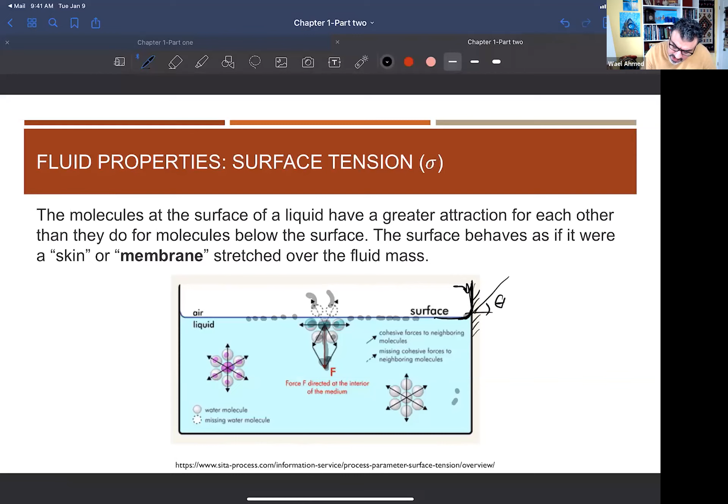So in general, surface tension is like a force only at the surface of the fluid, acting in a certain direction. So the definition from a fluid mechanics perspective, we define these forces in a property table, which basically lists those forces per unit length.

So it's asking you to consider if this fluid is in contact with a surface. At the edge of this fluid and the surface there's going to be some length, a contact length between the surface and the fluid. And the surface tension given here will be force per unit length.

That's why, for example, for an air-water surface, you will see the surface tension is 0.073 Newton per meter. Surface tension force is always given per length. So to find the surface tension force, we have to multiply the surface tension property by the length where the surface tension force is applied. This is a length we're going to always be looking for in any of the problems.

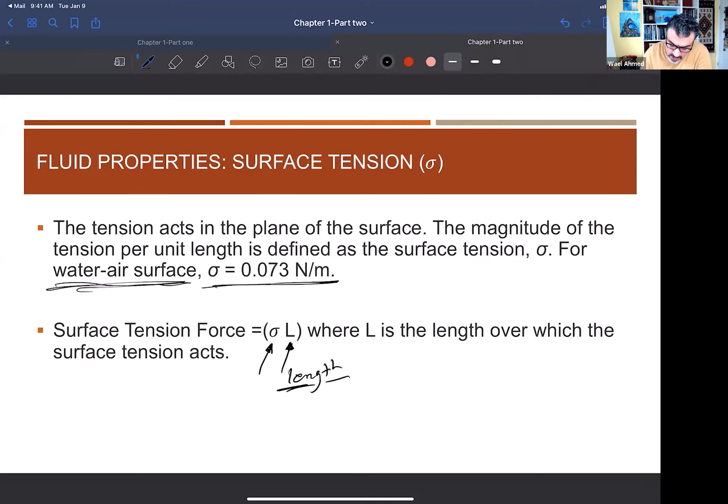So one very simple explanation for understanding surface tension is like when you see mosquitoes or any bug holding on the surface of a lake, and it can maintain balance under this condition. You will see it's basically standing as if the surface of the fluid or the lake is kind of a skin or a membrane that this bug is standing on.

And if you magnify this section and consider the bug's leg here as a cylinder, there's going to be some weight for this bug that is going downward.

And at the surface, the contact between the bug leg surface or body and the fluid, there's going to be some forces acting in this direction, and this is what we call the surface tension force. So you can consider there are some contact lengths here and over here as well, with some forces acting in this direction depending on these lengths.

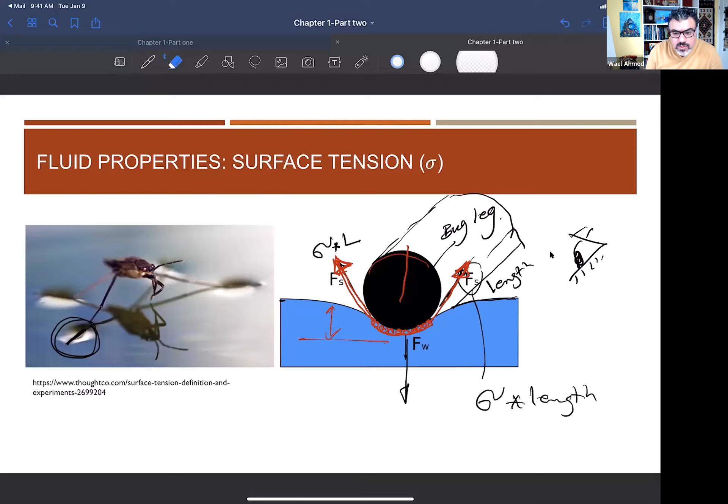As you can see, the bug here is standing at the surface of the liquid. If this bug has a larger weight, it might sink and it cannot stand at the surface. I have an example for you - when we do the analysis, we're going to find out how we can do this.

So let's do the analysis for this bug. One of the things given in this problem is how much maximum mass this bug can have to stand at the surface of the water, if the bug is suspended on the surface and the surface tension of the water is not wetting the leg - we'll talk about wettability in a few seconds.

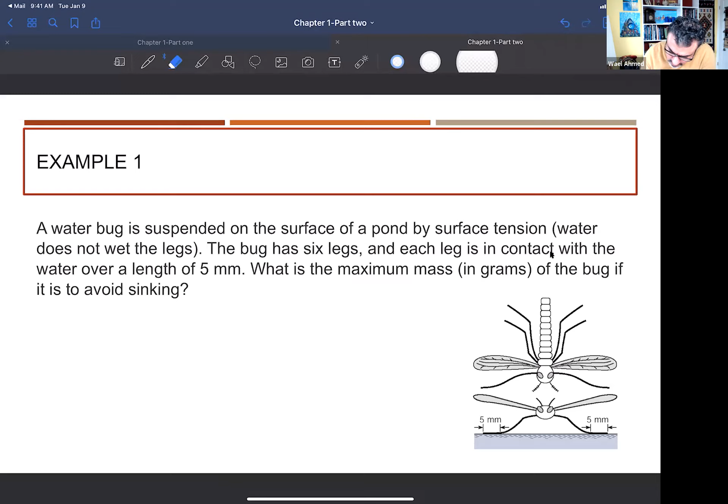The bug has 6 legs, right? So you have 1, 2, 3, 4, 5, 6 legs, and I'm looking at this from the top. But if I look at it from the side, this is basically the bug actually standing at the surface of this fluid.

In contact with the water over the length of 5 millimeters tells you that the shape of the bug's leg is actually stretching over the surface of the liquid, and the contact length is 5 millimeters. So it's not standing at a point, as you can imagine.

So now we need to find out the maximum mass in grams of this bug in order to avoid sinking. Of course, if there were a huge object or a big animal trying to stand on top of the water, it wouldn't work. We're not talking about a large surface tension force here - only a small number, which means only the surface of the water can hold very little objects like bugs and mosquitoes.

Okay, so how can we start this? I know some of you don't like writing these assumptions, but this is very important and you have to train yourself on this. Every time you read a problem, as part of your initial analysis, put the assumptions - what do you have, what's given, what's missing, and how can we use this information to formulate the problem.

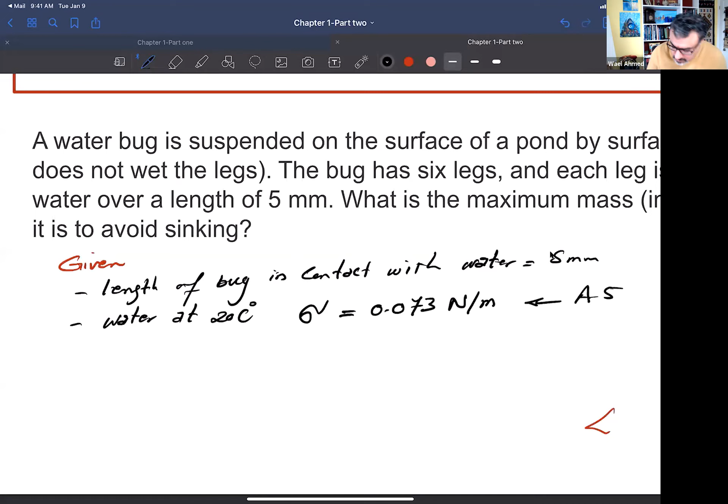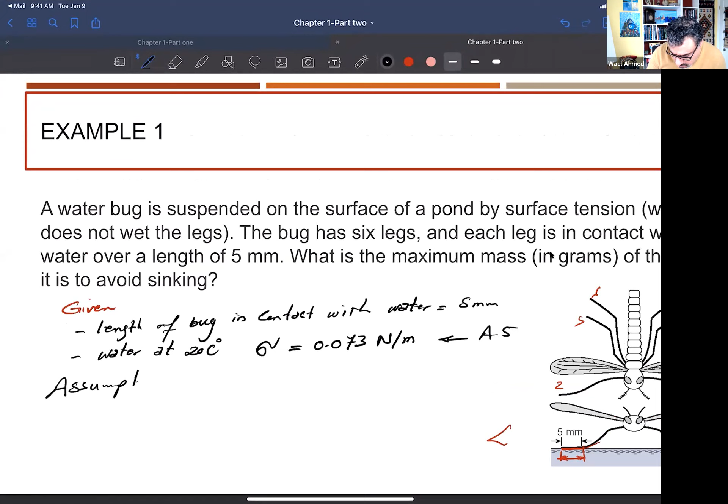So what assumption can we make here? What assumption can be made about FG spread over the 6 legs? Of course, the bug will be symmetrical, right? Anyone disagree with that? Perfect. Water at 20 degrees C - sure, this could be an assumption, no problem. So I can get the property at this condition.

I like this - the force will be distributed equally on the legs, right?

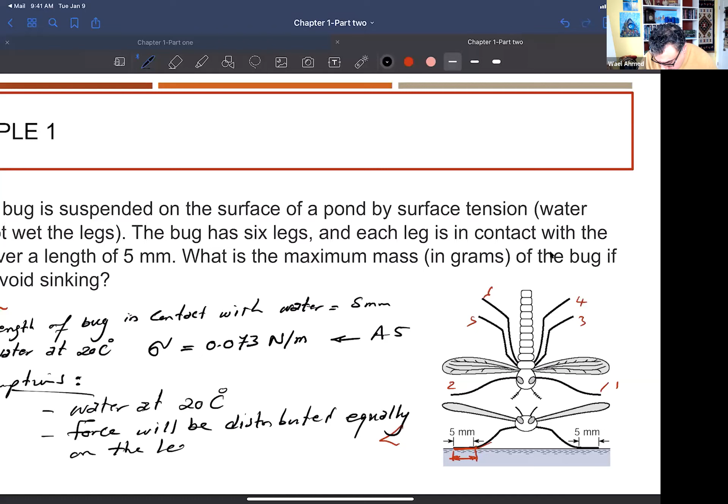What other assumptions? The water is still, sure. But what's most important is that it's still - the water, the bug - exactly, right? So the bug is under balance condition, stagnant, stopping at the surface. Even if there are waves and stuff, that's not our concern now - we're trying to simplify things. But the bug is stagnant, and the force applied on the bug will be distributed equally between the legs.

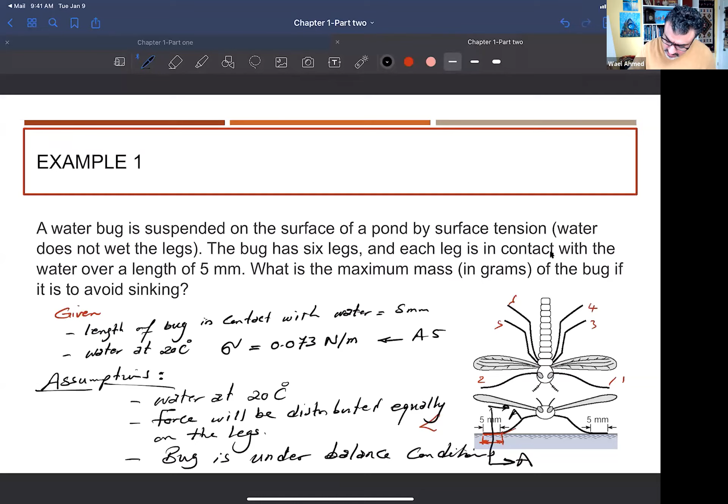So in order to get the total forces, we have to look at a cross section here. So I can look at this cross section - let me just do this.

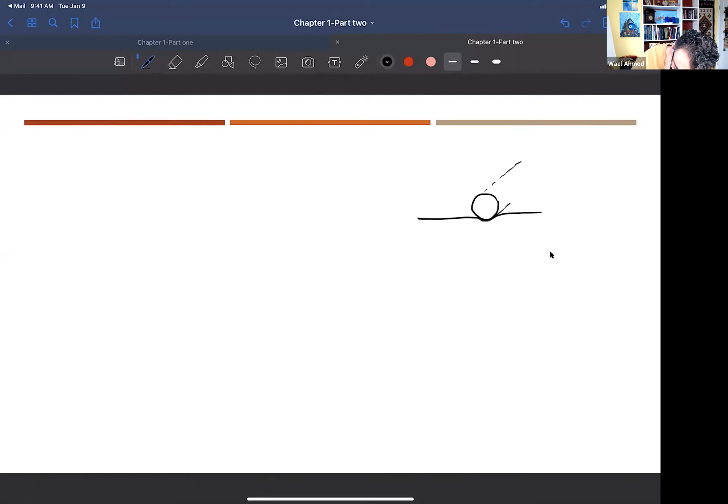And when I mean here by the cross section, this is the leg, right? And I know that this contact length between the bug leg and the water is 5 millimeter, right?

Gravity, that's right. Basically the summation of force will be 0. Remember, I know there is no difference between constant velocity and a static type of thing, because summation of force will be 0. But I want you to make sure that when you are writing something, it has to be correct.

So we don't have motion here. So when we are talking about summation of forces equals 0, we are talking about static, we are talking about balance, right? We're not talking about steady motion or a 0 acceleration. So you have to really differentiate when you are writing these things, okay?

Contact area. So let me focus more on the solution here, because some people are making comments here. But let's say that this is basically the same way as we explained before. So this first layer here is stretched, right? So it's almost like you are carrying the liquid surface. Part of this liquid surface is carrying this leg here, right?

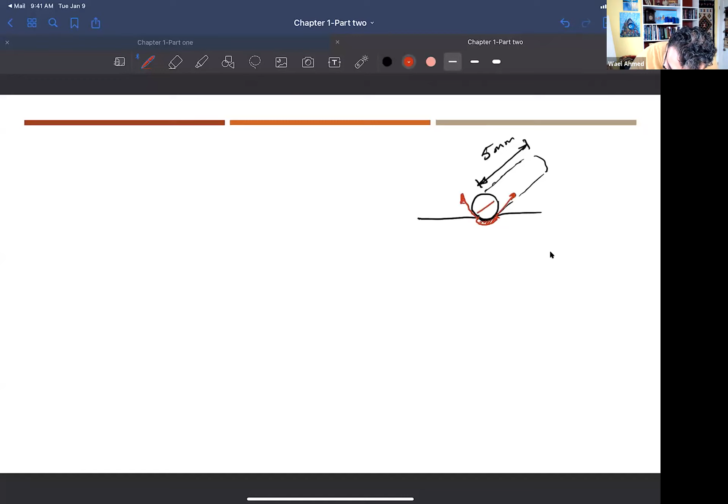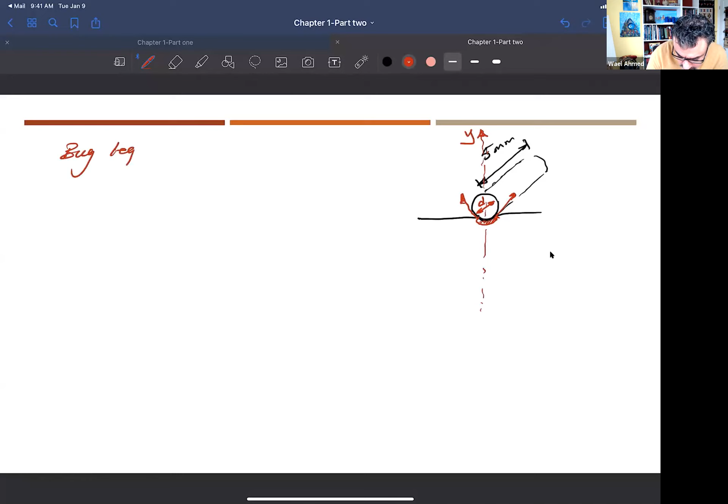And let's assume that this diameter here is D, right? So in this case, this is the vertical direction Y, okay? So there's going to be some angle here, right? So theta, right? What do you think about one assumption that can simplify the problem?

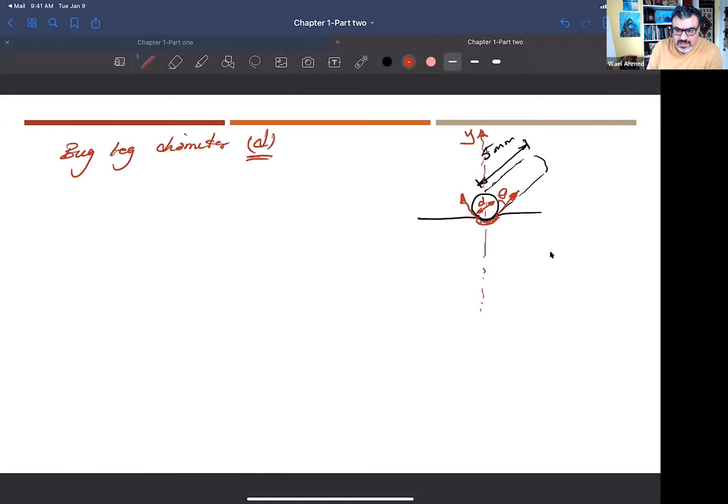Because we don't have the material for this bug leg, right? So we're not doing any biology analysis here. So what kind of assumption in order to simplify this problem? Can we assume this diameter very small? In our fluid mechanics course, we're not really concerned with molecular dynamics. So the length we are talking about here is a very small number. So D here is very small.

Right? And when you imagine D is very small, it will basically shrink into a point, right? So as if this cylinder shrinks into a line, right? It's a very small little point. So what do you think about this theta now? So small, exactly. It's almost 0, right?

So as if this can be converted into a force, right? For each line, this is F and this is F, right? So the force here is equal to what? Anyone? Yeah, first we are talking about surface tension force. Right? It will be basically the sigma

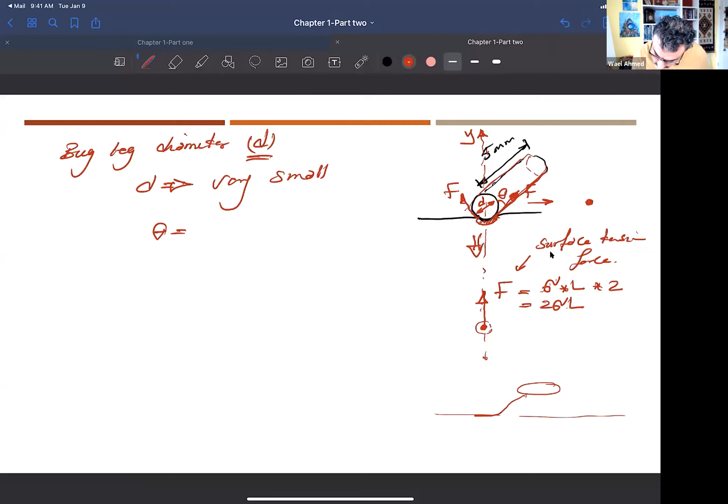And the bug weight will be in this direction, right? But again, the weight will not be applied at the leg. So if we're looking at the bug here, the balance, so theta is 0, right? So now in order to start the problem, we can say that the summation of forces is equal to 0.

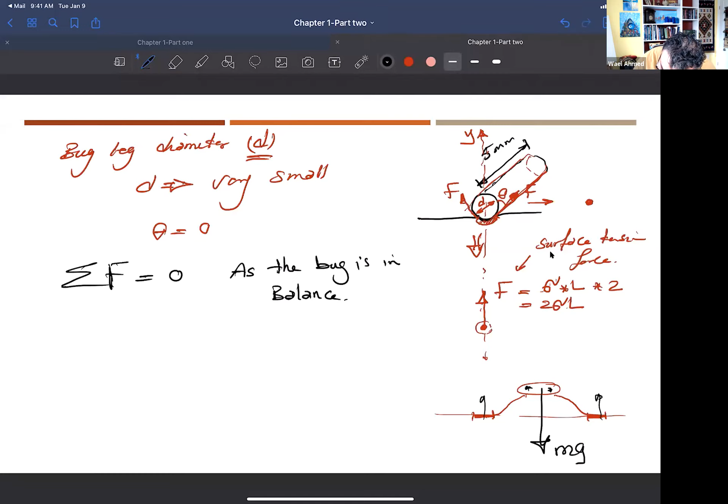So now we have a force that is mg, and this is the total weight of the bug that is acting on the center. And this center could be an imaginary center, right? But now we have forces over the 6 legs, each one of them coming from the surface tension. And for each leg, we have 2, so for each leg, 2 sigma L.

So if I need to do the force balance here, I can take this as a positive direction. So now I know there are some forces here, F leg, and some other forces, F leg for each leg, right? And we have 6 of these. So summation of force here will be mg,

minus, each leg has 2 sigma L, and I have to multiply this by 6, right? And this will be equal to 0, which means basically I have a static condition in this case. So I have m is equal to, I can just take this and put it on the other side, 12 sigma L over g.

And it's very straightforward. Here I can show why it is times 2, one on each side. I hope you can imagine this: when we have a cylinder and the cylinder is carried by a small little surface, you can just look at it from both sides. You will see surface tension forces applied on this.

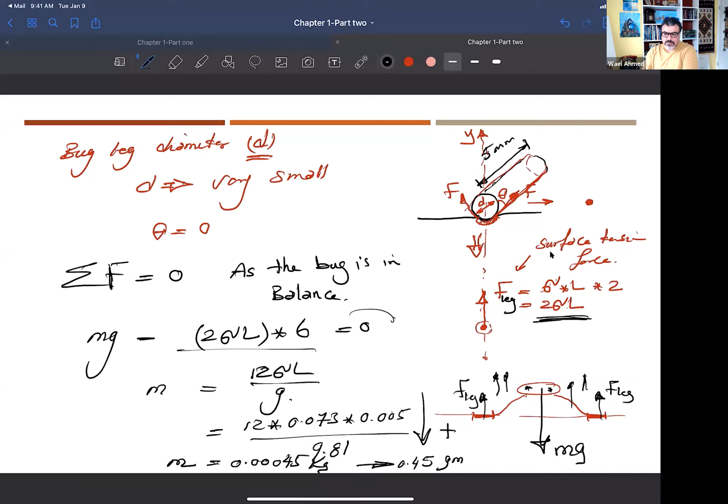So when we are talking about surface tension, the problem that we just solved is one of the applications. But surface tension is involved in many applications where you are trying to define the droplet size, right? And this is very important when we are trying to design fabric, for example, where the contact length between the fluid and the surface is very high, and then you will see some phenomena related to surface tension. We call it wetting and non-wetting condition.

Surface tension is one element, but the other thing that is very important is the energy of the surface as well. We are not into material analysis in this course. We are just giving you an idea that in some applications you will hear about surface tension when we are doing this analysis.

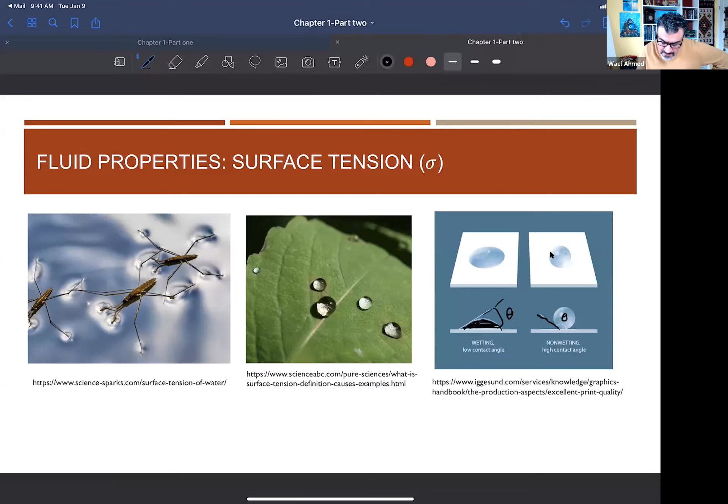So for wetting problems, for example, you will see that the fluid is in good contact with the surface and is giving you this kind of angle theta here. And if this theta between the droplet and the surface is greater, you call it a non-wetting surface. Applications for that are, as I mentioned, fabric and all the material that is water repellent, where surface tension forces are taken into account when you design the surface. Inkjet, all the printers, right?

Remember particle dimensions: this particle dimension can be created by a nozzle that is injecting fluid at the surface in order to do this printing. The droplet size is a strong function of the surface tension property. Okay.

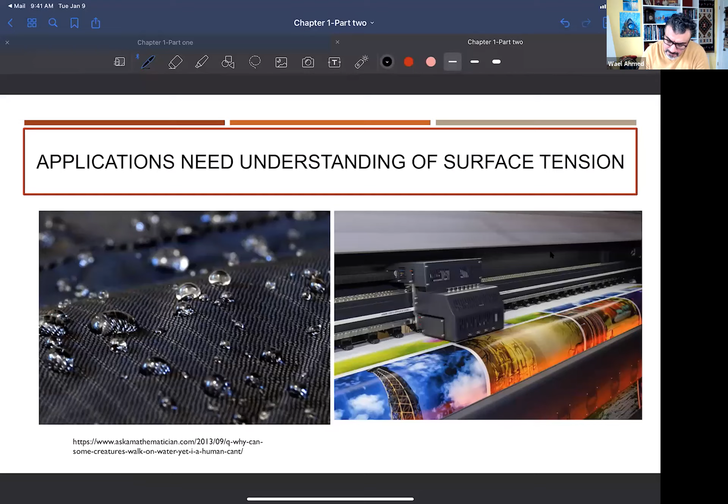As I mentioned, in many applications when you are talking about sprays, surface tension is not the only property we have to consider in order to characterize the spray or these jets. But as part of this problem, we have to really understand how surface tension affects the problem, right?

So when you are talking about injectors, like gas injectors in internal combustion engines, those injectors are designed in a certain way, and different types of fuel will create different sizes of the particles that you spray inside the combustion engine, which means that evaporation of these particles and the heat transfer inside will be affected by the droplet size, okay? So when you are characterizing this droplet size, you will see some surface tension force that you have to consider.

Same thing when you are talking about boiling, for example. You see here in this picture, in the boiling process you are adding heat, and this heat is converting liquid into steam, and this steam will start having those kinds of shapes of bubbles, and those bubbles maintain some shape based on many forces.

Some people were asking in the beginning about buoyancy forces, right? You can see here, this is inside the fluid. So this bubble here will be affected by some buoyancy forces, but also the way that it maintains its shape. Of course, this is a very complex shape. But in order to maintain a certain shape, some of these forces inside this bubble will be part of it as a surface tension force.

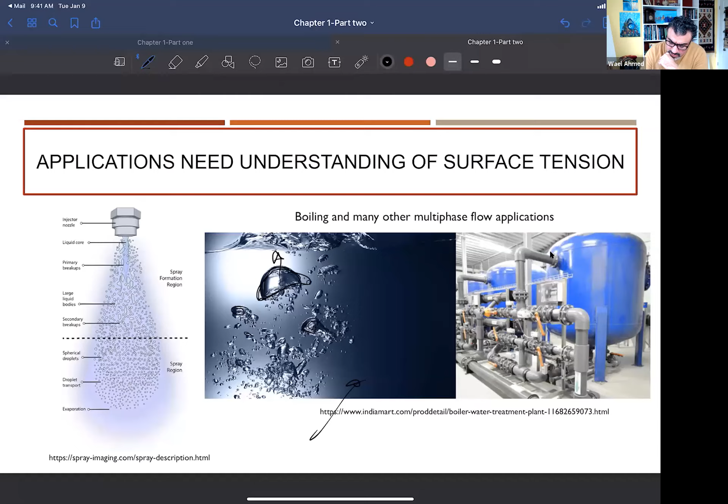I don't know if you heard about capillary action and surface tension force in your high school, right? Did you hear about that? Anyone? No? Okay. Have you seen an old thermometer? Some people maybe have in their house a thermometer you put on the wall or outside to see the temperature. And you see a very thin tube. Yeah.

Those thin tubes are carrying fluid, and this fluid is expanding inside this tube, right? Sometimes you'll see this red fluid, and depending on the temperature, this fluid will expand and go inside and indicate the temperature. So the design of this classical thermometer has to take into account something called the capillary or the surface tension. And capillary here means fluid will go in a small little channel with a certain length, right?

So if you can imagine now, let's look at this here. You have water and you have a tube like this, and the tube has a diameter D. Now fluid will go inside this without any pressure, just the normal atmospheric pressure. The fluid will just go to a certain level. We call it H, and this H is the capillary length, right? But if you put, for example, mercury, you will see for the same diameter of the tube, the mercury is actually holding back from going inside this tube, okay?

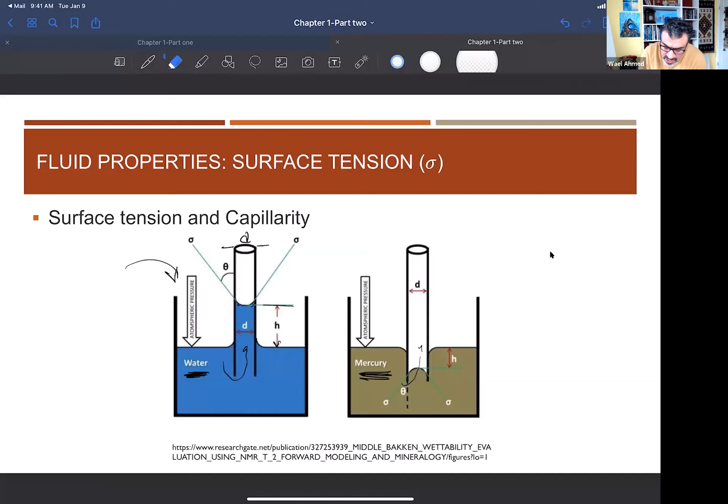How can we describe this? Let's look at a simple tube like this, right? It just gives you an idea. How can we relate? So this is a tube, and this is fluid, and inside it's a liquid in this case, right? So we have fluid that has moved to a distance h, and the surface is taking this shape here. So what is actually pulling up this fluid inside is the surface tension force.

So imagine now I am holding the surface, and I am pulling this surface up inside this tube, okay? So what will be the surface tension force here, and which contact? Remember, surface tension is force per unit length, right? So where is the length in contact between the surface and the fluid? What can you imagine about this length now? Let's look from the top. When we look from the top, what do we see for this tube? Not correct. Remember, the length is the circumference.

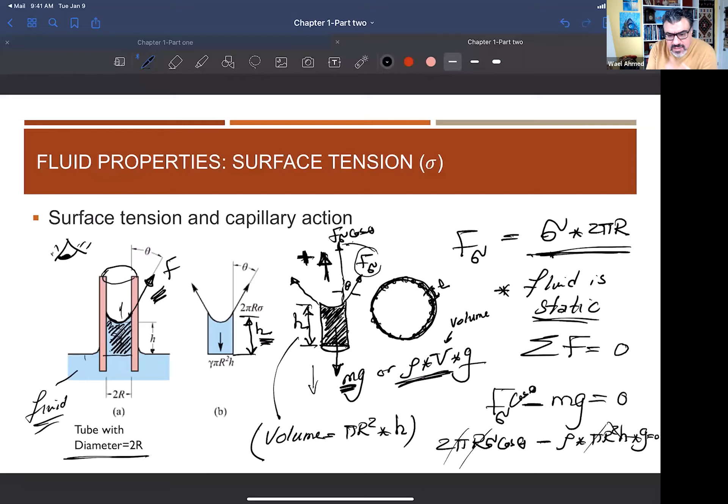So what I'm saying is you will have H equal to 2 sigma cosine theta over rho g r. When you calculate this in real life, for example for water, you will see that H is very, very small, like 0.00 something meters, less than 1 millimeter. That's why capillary lengths will be different for different fluids.

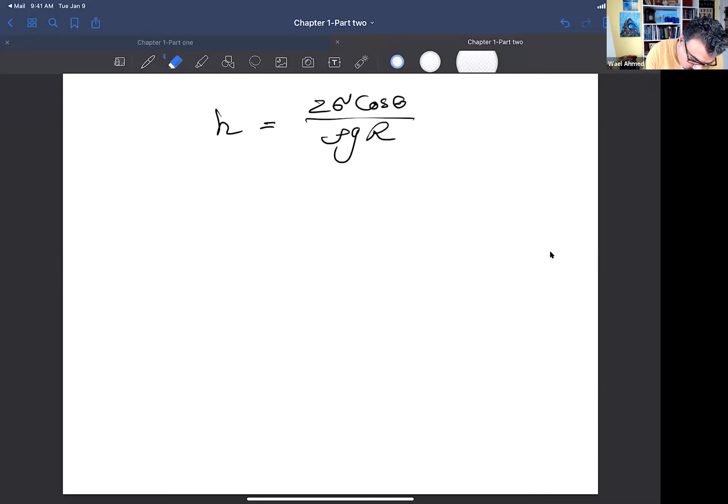And you will see its function H is... no, it's not writing. Yeah, for some reason. Yeah, Apple Pencil is like, it doesn't like me. Do you mind just closing this and putting it back?

This is a kind of technical problem you never expect, right? It's connecting. Okay. Yeah, my God, that's not the best.

Okay, so what can I do now? How can I write down this? So H is... any idea, guys? Anyone who's an expert in the iPad? Looks like I have to really restart the iPad. Okay.

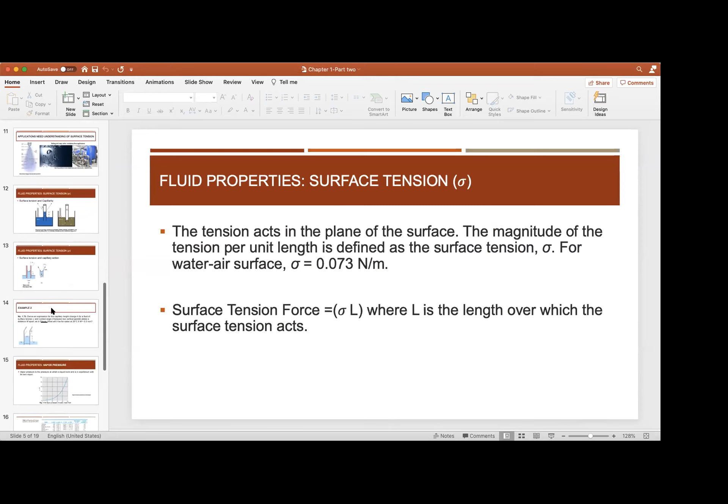Anyway, let's open the stuff on the computer so we can continue our lesson today. Okay, stop sharing this. So you can see that, right? Yep, yeah. And...

You can see here, basically, if you remember, H is equal to 2 sigma cosine theta divided by rho g r.

Okay, let me just restart my iPad so maybe you will catch this later on. Okay. So until I restart my iPad, I can just talk about this. It's giving me a message to install. Yeah. Not now. Yeah. I totally understand how you guys sometimes face these technical issues, because even though I tried everything before getting into the lecture, I'm still getting all this stuff.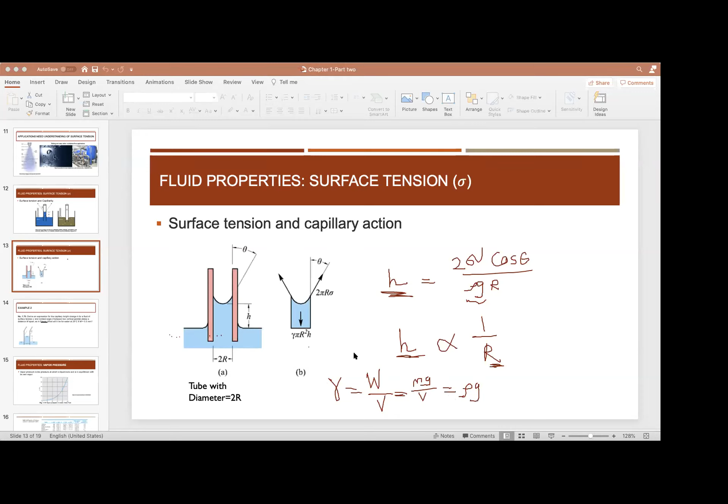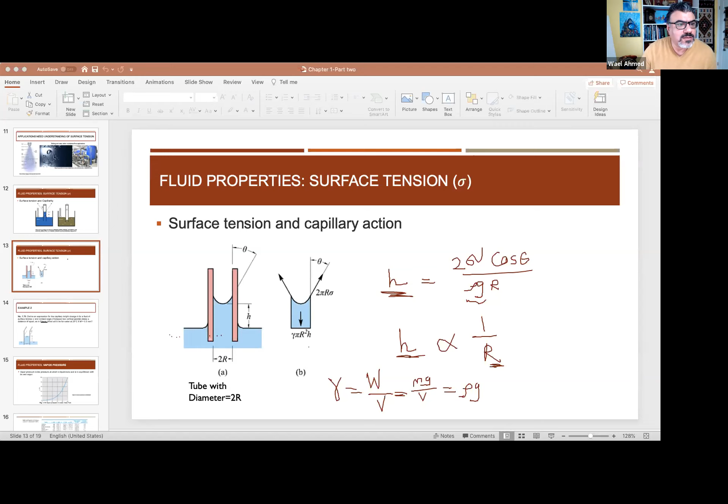So let me now... it's restarting my iPad. Hopefully things will work this time. I found the issue, yes. Okay, you'll be surprised to know the reason. It's just this small little thing in the bin has to be screwed inside. Unbelievable. Okay, so let me stop this share, and let me just share my iPad now. You see this now? Perfect, yep, perfect, so we'll keep going like this.

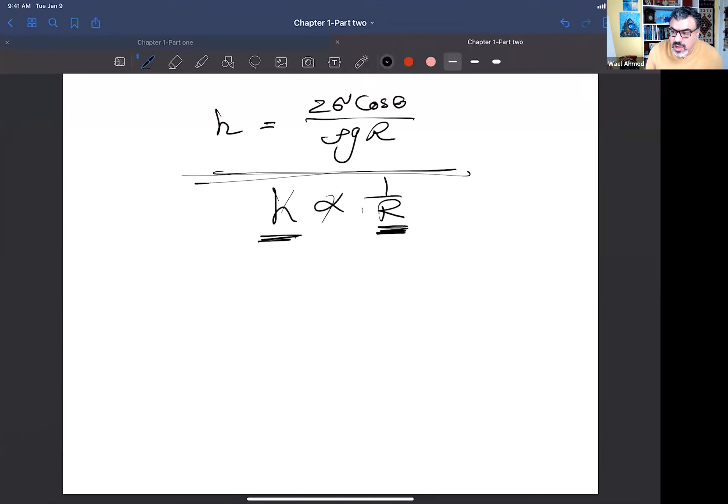So now you see this h is basically inversely proportional to the radius. So only when you're actually talking about tubes that are small will you see this h is actually big. And that's why you're only concerned, when designing something, with accounting for the capillary force or the capillary length in the tube when you have a small little channel.

And of course this is very important when you're actually designing, as I mentioned, a thermometer. You have to make sure you account for the capillary action, because remember when we were talking about the thermometer, the liquid is expanding with temperature. But now you have to consider what is the length inside the tube before even the expansion, before even the temperature change.

Another example is when you're designing fabric and small channels, for microfluidics for example. It's a huge topic on its own, microfluidics, when people use this for testing, taking a sample of blood and creating a flow of the blood without any machine. You just put your finger and the liquid goes through a very small channel. The force pulling this blood into the cell where you're testing it is driven by some kind of capillary force or surface tension force.

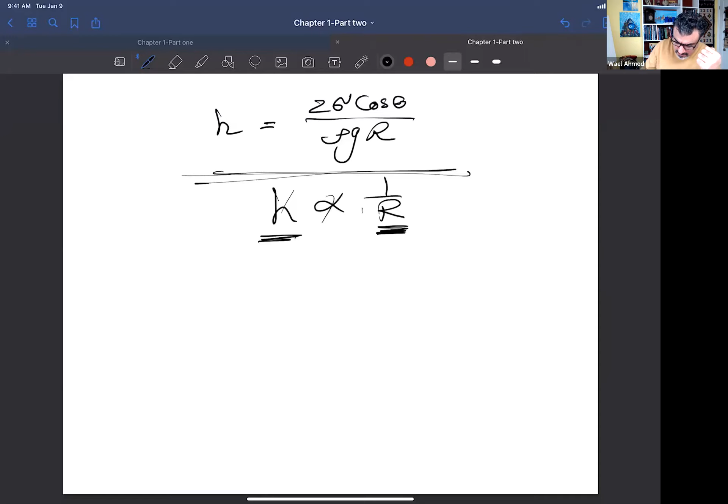Another example here, I'm not going to solve it, but just to give you an idea that every time we look at a different problem, we look at different conditions. For example, last time we were talking about a tube with a diameter, and the surface tension force acting on the circumference, and we got this surface tension force. Now, if I give you this example, which is a problem in your textbook or maybe the problem set, what do you think about the forces here if you already consider a similar analysis to what we've done before? Now we have this part here.

And this could be the surface tension force. And this will be the weight, mg, right? Can you tell me now what is this surface tension force?

This is two plates, that's not a tube. What do you think the length affecting the surface tension force is, which length here? The two sides, exactly, right?

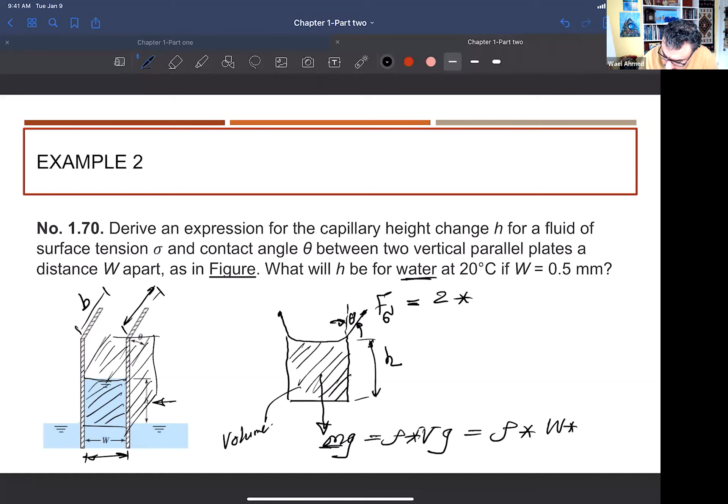This fluid has a certain volume, which is, we have to assume this distance, right? Yeah, length, that's fine. L or B or whatever, simple, right? But this length is not given in the problem, and maybe we don't need it, but let's assume that this length vertical to the paper is B, right? So in this case, I can write down this mg in terms of density times volume, and the volume here is simple, is W times H times B, right?

This is a volume, and then multiply by G. This will give you the total weight of these fluids. And the surface tension force here is 2, because both sides, right?

Sigma, this is the surface tension force per unit length. And now the length applied over this surface tension force is, anyone? Which length here? B, exactly, right? So we have 2 sigma B, right? And we have this angle theta.

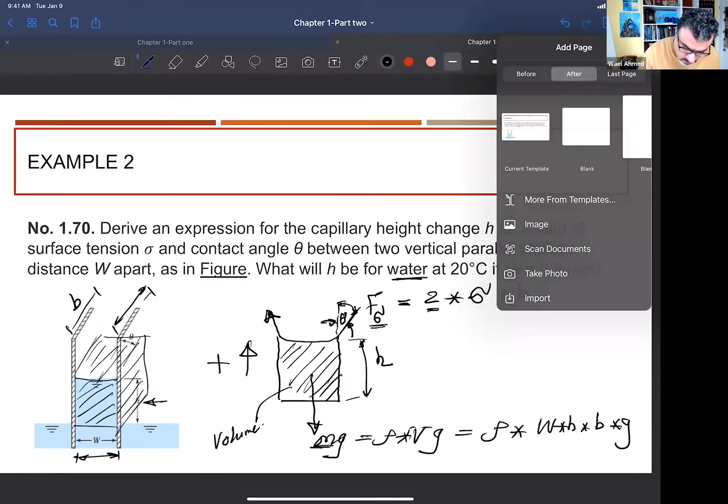That means if we take the summation of force in this direction, we'll get the same kind of analysis that we did last time. So in this case, we have the balance here. The summation of force would be 0. So if you look at this as a positive direction, F sigma minus mg is equal to 0.

F sigma is 2 sigma times b cosine theta, right? So this is a component of the force. I didn't even talk about the horizontal component. What do you think about the horizontal component? Does it really matter to us in this case?

It cancels out, right? And even if it's not canceled out, in other types of problems, what do you think? Like, we are actually talking about the balance in this direction, so we are not really concerned with the horizontal direction. We are only concerned with the vertical direction, right?

So in this case, we have 2 sigma b cosine theta minus WHB, this is a volume, rho times G, is equal to 0, right? It looks very simple here. I can divide by B, right? Because the whole equation divided by B, B actually doesn't matter.

And that's why sometimes in many applications like this, we consider unit lengths in the vertical direction, right? So in this case, I can say that H will be basically 2 sigma cosine theta divided by rho G W. And W here is the width of this channel, okay?

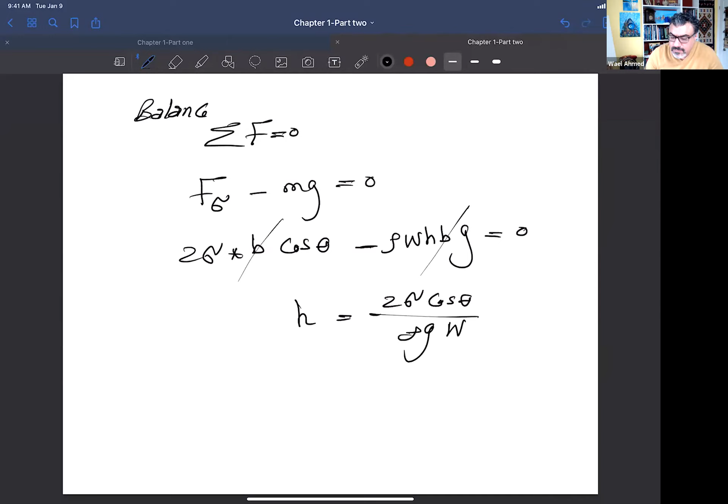I will let you handle the numbers here. So if you go to, in this case, water, you will find sigma for water, you will find theta also for water will be, for this surface, 0, right? So for water, let's assume complete wet surface here, meaning like a glass or something like this, because it's not given in the problem. So theta can be 0 in this case, right?

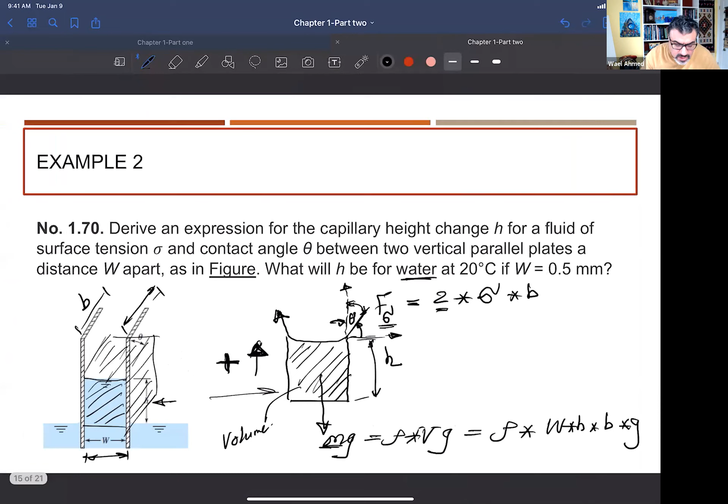So you have sigma, which is 0.072, and W is given as 0.5 millimeter. You can find out H. I didn't calculate it myself, but you can do this, right? So you can complete this.

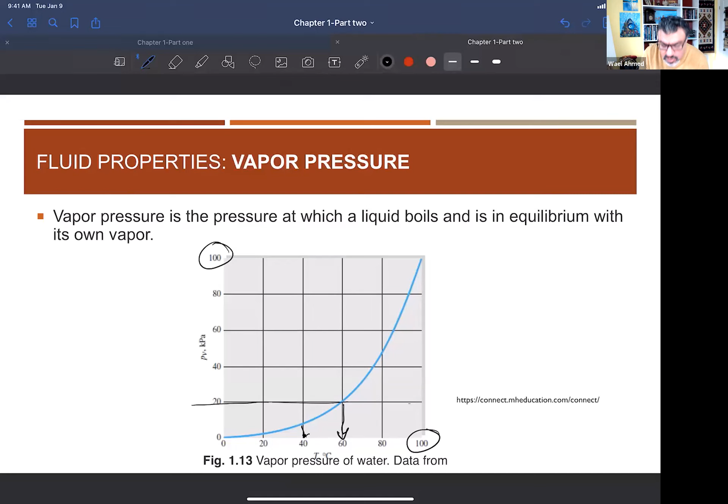The idea is many equipment reduce pressure to create suction. So the pressure can reduce to a point where the liquid evaporates. What happens after that, when the liquid evaporates, is you start having bubbles. As you go inside the pump, the pressure increases again, and those bubbles disappear under something called cavitation.

The bubble is generated, and once it's there, the pressure outside the bubble increases. So what happens is the bubble collapses, removing the space inside—that's why we call it cavitation. If the liquid evaporates under this pressure and then starts condensing again, the bubble condenses into a small size that creates a vacuum.

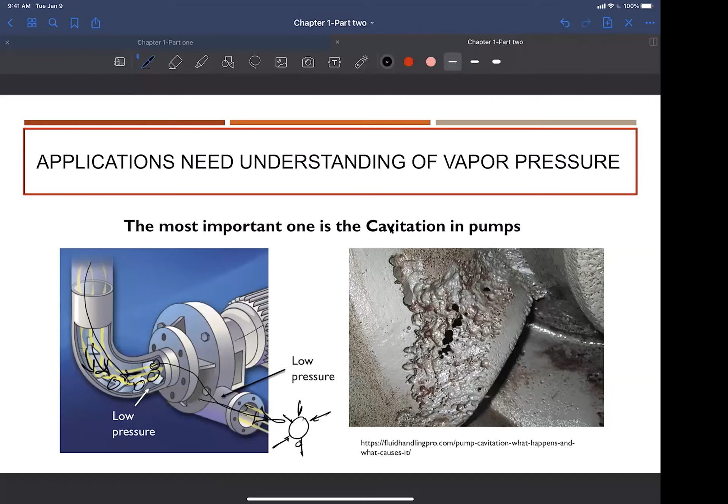May you go back to the last table? Sure. Not this one, right? No, that one, please. Yes, thank you. All right.